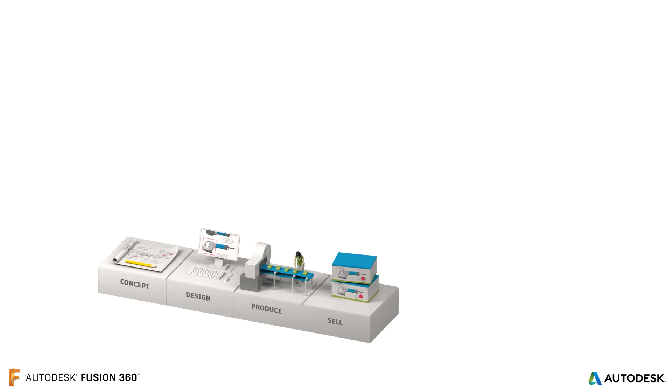If we start by looking at our customer's current process, we'll see that it is quite linear in nature. They start off on a concept phase, maybe creating some hand sketches for the design they want to generate, move into the process of generating more detailed design work, generating 2D drawings and bits and pieces like that to manufacture their products. Move into a production phase, into a traditional sales phase where they need to sell and see what the markets are doing, and then finally into an operate and retire phase.

Now we term this a traditional product lifecycle, and it only has a fixed product value. During the sales and operation and retire phase, companies are usually thinking about the next design that needs to come to market. Now, here at Autodesk, we're looking at the future of making things.

Our understanding of the future of making things is: during the concept phase, we personalize that engagement with the customer, giving them a bit more of a customized product. During the design phase, we collaborate with virtual teams across different time zones potentially. During the production phase, we take advantage of all the advancements in manufacturing, such as additive manufacturing with 3D printing and metal additive, as well as the advancements in CNC technology.

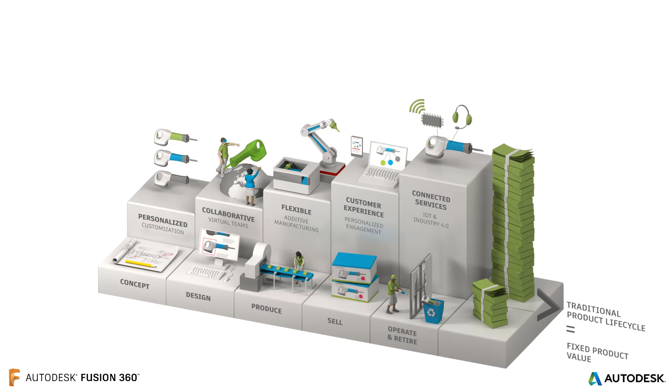During the sales phase, we have a more engaged customer experience, giving the customer a bit more of a personalized engagement. And then finally, we can go ahead and connect all of our products to IoT and Industry 4.0 to gather more information from the product while it's in use. We term this product as a service, and it has an increased lifetime value.

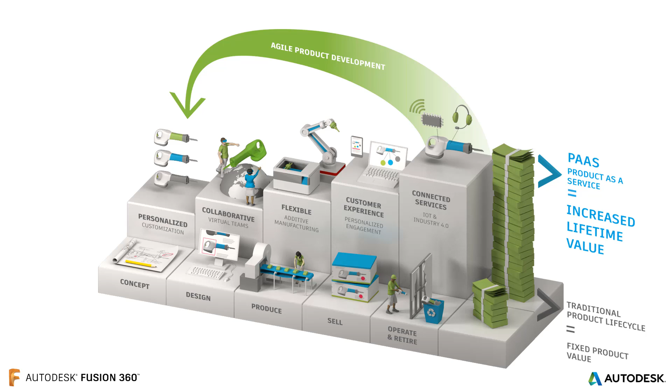This gives us the ability to have a more agile product development, taking information from when the product's out in use and informing that for the next generation of product that we need to generate. We term that the future of making things here at Autodesk.

We go ahead and sit that on what we call the product innovation platform. At the center of this platform is Fusion itself. We have our design phases, so we can quickly and easily start to generate the design that we need, from concept all the way through to production.

We go into our make phases and we can harness all the technology for CNC machining as well as 3D printing, and finally into the use phase, to then go ahead and connect our product and generate a nice complete solution from design, make and use.

Now, pushing the boundaries of this, we have other technology that sits within Fusion as well, something called generative design. From here, we can start to develop the design, optimizing cost and material usage, still maintaining strength, and still keeping that weight low, giving us a better product as we go.

During the make phases, we go into industrial additive. We have the ability to integrate CNC as well as additive manufacture, giving us the ability to potentially 3D print something and also do some final machining on it.

And then during the use phase, we have a product that we can connect into the ecosystem to then have Industry 4.0 feed us back that information into the design, letting us make more informed decisions earlier within the actual design process. This is what we term the product innovation platform.

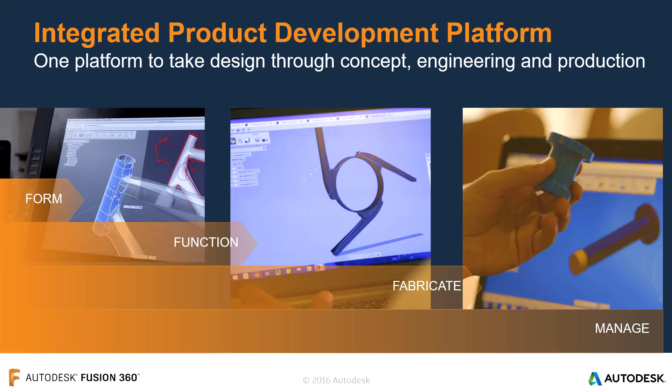It's a single integrated product development platform to take our designs from concept through to engineering and out to production. We can then look at the form, generating the model within Fusion, look at the function to test that everything fits together as it should, out to fabricate, whether these are traditional CNC machining methods or even the additive environment, and then manage all of that data within our product development platform.

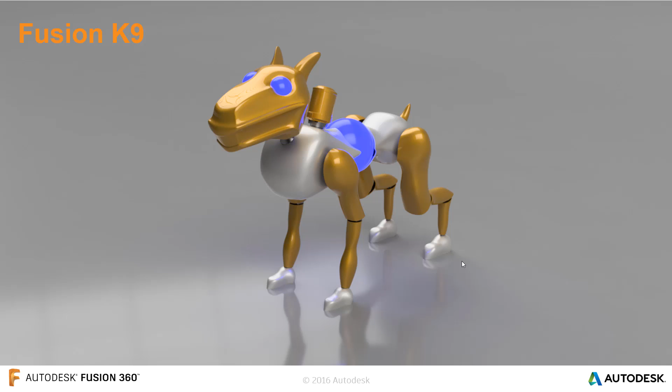So today we're going to go ahead and look at something called Fusion K9, which is a robotic dog. We're going to design a part of Fusion K9 itself, and we're going to take you through the product innovation platform. We'll look at the design phase, move into some communication, some virtual testing, a bit of visualization, and then finally the create phase itself.

So let's take a look at the design aspect of Fusion. We're going to design that chest that you see on the right hand side of the screen, and look at some parametric modeling as well as complex surface and ergonomic shape creation within Fusion 360. We're going to see the integration of the platform itself so that we can take a design really quickly from just a standard product all the way through to something a little bit ergonomic.

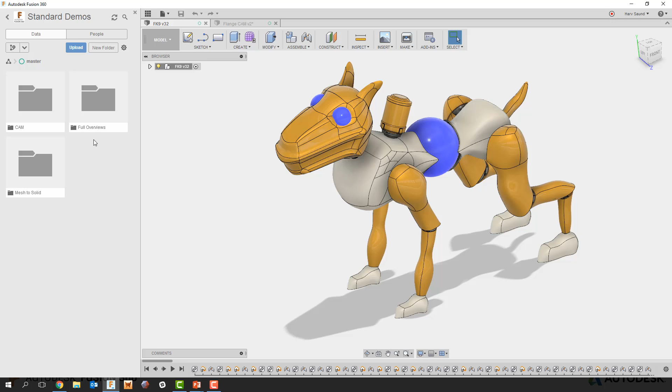So let's jump into Fusion. Fusion itself is quite a clean platform. As you can see, I've got Fusion K9 on screen just here. We have a nice toolbar along the top that's very neat, and a tree down the left-hand side of the screen that gives us all of our parts. We have the ability to see all of the projects and data we are working on, on the left-hand side of the screen, so we can access any part of that environment and organize that data as we need to.

So let's hide just the chest cover of Fusion K9 just here so that we can see what we're actually going to design. We need that chest section to fit into the actual part, into Fusion K9, and we can see the parts that need to merge into that body, so we can quickly and easily start to develop that design within Fusion.

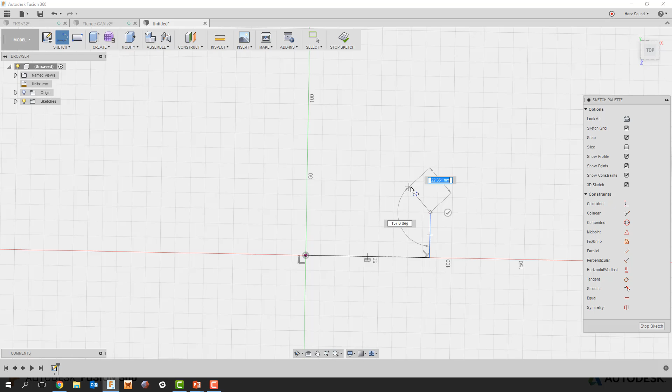So let's jump into a new design and start sketching. The first thing we want to do here is use your standard lines, arcs, circle tools to generate a real quick, real basic profile of what we're trying to create. Now this is just going to be a cylinder, so we're going to draw a few lines out, and then revolve this afterwards.

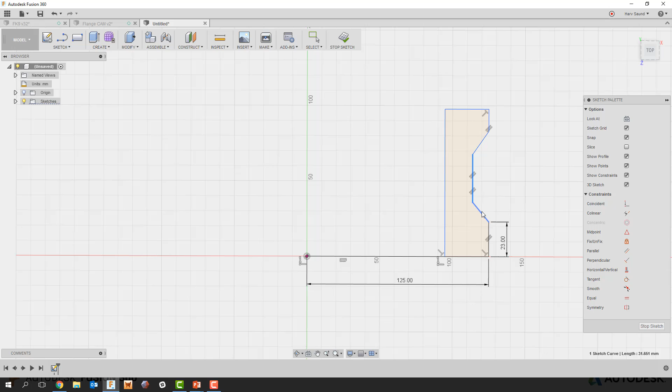Just like any parametric design, we may want to put some dimensions to the product so we can quickly start to set some real reference dimensions for our design. We may want 23 on this side, we may want to put some angle dimensions in, and really quickly within Fusion we can start to generate all the information required when we go to production right at a concept phase just here.

So we've got a few more dimensions to put in just here. We may want a height dimension or even a width dimension between these two lines, maybe a height dimension for the overall of 75 mil, and then maybe an overall from the origin as well. So really quickly, as you can see, we've got all of those dimensions in place ready to go.

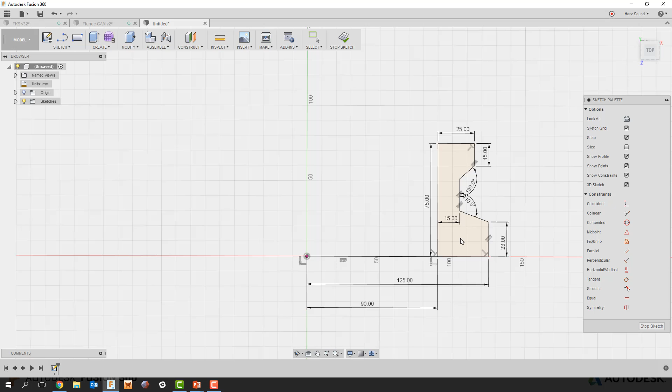Now we'll take that sketch that we've just created and jump into a revolve really quickly. From just a 2D product, we can turn the product directly into 3D. It's great, but it's looking a little bit blocky, so let's put some more curves to the design itself. Fusion's got a real powerful modeling engine, so really quickly and easily we can start to generate some nice shapes and curves for the design by just using our fillet tool.

We need to put a shaft through the center of the design, so we need to create a little hole for our design itself. We'll make it a 30 mil circle on the center of our design. We may want another one of those circles just below, so that we can fit a secondary shaft in place, just an idler, and then we'll put a dimension between the two of, let's say, 10 mil. We'll also line this second circle up by using some constraints to the first one.

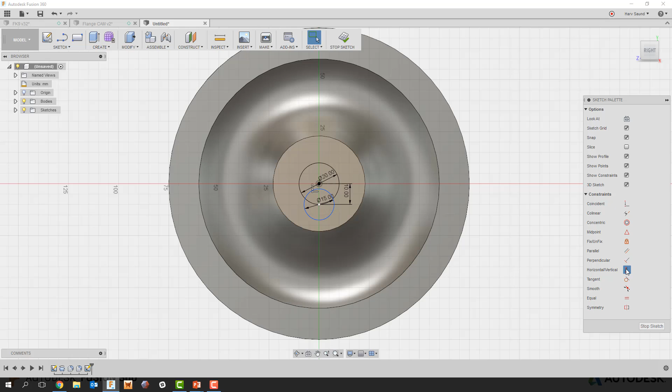And then from there we can pick the areas that we want to create a hole from, and we'll just drag that back, and again very visually we can see exactly what we're doing within Fusion itself.

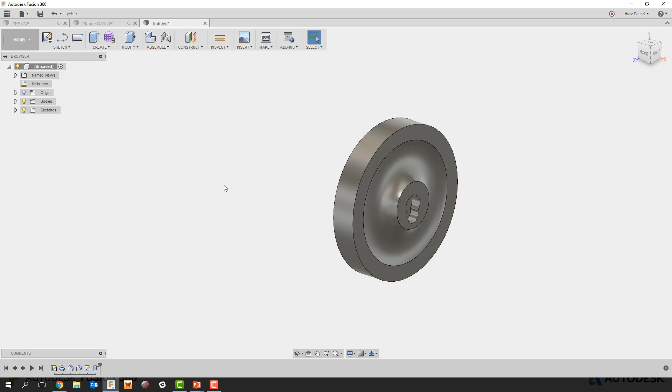So great, we've created a parametric design within Fusion. We could go ahead and go into our drawing environment just here, but we need that ergonomic shape in the middle first. So we're going to jump into Sculpt, and we're going to go ahead and use a primitive shape.

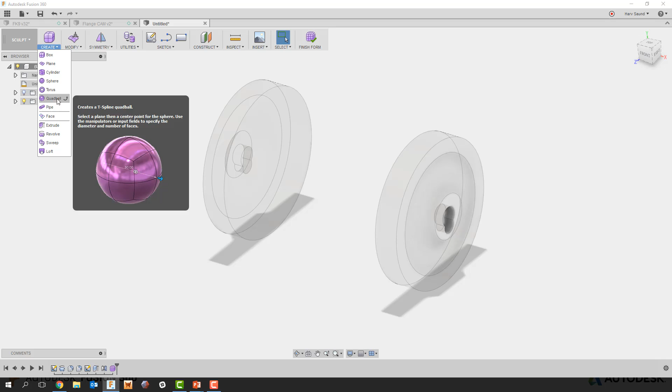Now Sculpt is like using plasticine. We can quickly and easily start off with a primitive shape, put any symmetry and bits and pieces in it that we need to, and we use push and pull technology. Now this technology is called T-splines. So from here we can quickly start to generate some real ergonomic, real nice detailed shapes for our design.

We may want to go ahead and create some hard edges just here so that we can line all of this up to the parametric shape that we've already generated. So we're going to use a tool called crease just to crease those edges. And what we'll also go ahead and do here is just select those faces and flatten them off, kind of creating almost like a drum for our design.

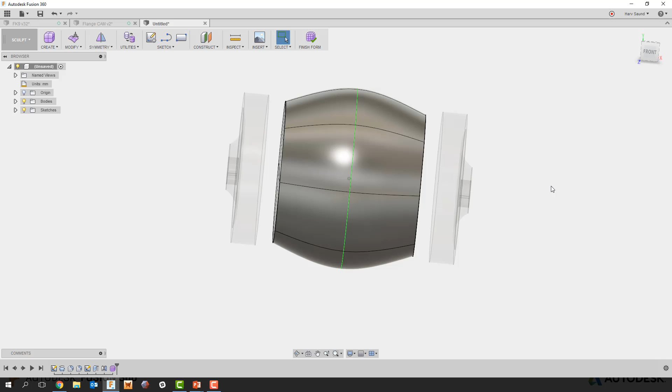Specifying a couple of edges, we can quickly jump into our edit form tool and allow us to quickly push and pull that design as we need to. We can scale edges, we can drag, and we can move as we need to. So it is just like when we used to play with Play-Doh or plasticine as kids.

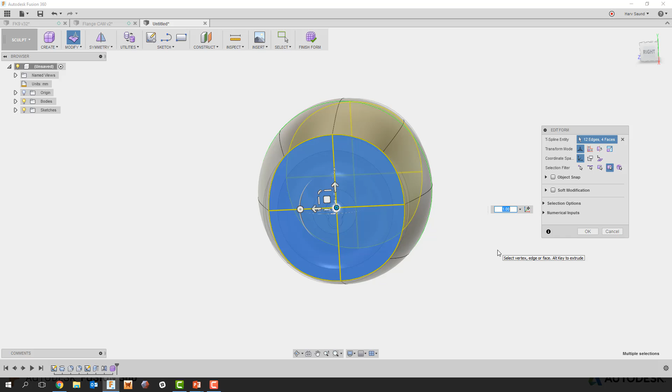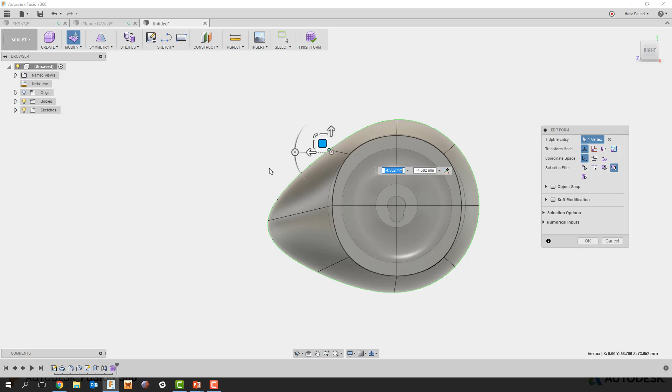So great, we've been able to go ahead and line everything up at the moment. But what we want to go ahead and do is just drag this front section out. It's as easy as a couple of clicks. Really quickly and easily pick the point, choose how you want to drag it, and you can quickly go ahead and drag that design. So generating that initial wow model and the initial ergonomic shape is quite quick and easy to do within Fusion itself.

Already with a few clicks, we've generated Princess Leia's head just here. So really quickly and easy, we've been able to go ahead and look at generating the part using parametrics, the two side pieces, and also using T-spline technology to generate that middle ergonomic shape. We'll give it a save, and it also creates versions for us.

So let's just jump back into the PowerPoint. We've looked at that 3D design development, generating the actual parametric shapes that we need initially. We've gone into the complex surface design tool slightly so that we can start to look at some of those ergonomic shapes, and it's all within that one integrated environment.

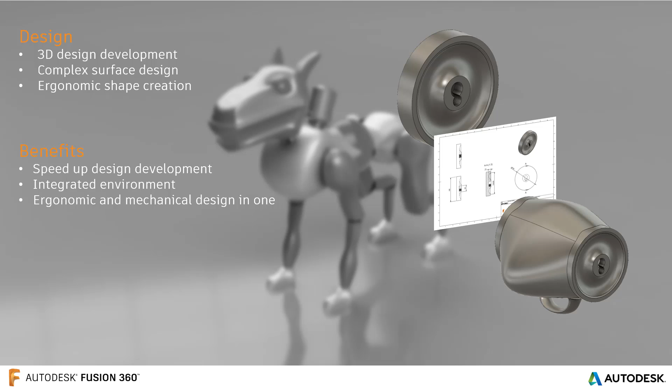So let's go ahead and take a look at some of the benefits. We can speed up that design development. Like I mentioned, it's in an integrated environment, so we can quickly and easily go ahead and iterate the design between the two, and we have that ergonomic and mechanical design in one. No need to go ahead and turn add-ins on or off. We've all got that all in that one environment.

That's our design phase done. Let's move over into our communication. Now, communication is key when generating designs for our customers. So we're going to go ahead and look at some of the really powerful communication tools within Fusion 360.

Now, we can collaborate with different teams on different time zones quite easily within Fusion. We have something called live review sessions, which we'll go through in a bit, and we'll also go ahead and look at some of the approvals and recommendations quite instantly that you can get. So let's jump back into Fusion.

Let's go ahead and look at this communication tool. So down at the bottom of the Fusion window on the left hand side of the screen, you'll see a little comments tab. From here, we can start to generate comments for our design, giving any kind of comment that we need at any type of position that we need at this stage. So let's put in chest V1 done. What do you think? And we'll post this.

Now, one of the key things for us within Fusion is we've got the ability to either open the design on a web or even on a tablet or a mobile phone.

So we can quickly and easily go ahead and access that design anywhere we are in the world, just in a web browser. As we can see from here, we've got that design open in a web browser.

We can see the version, and we can also go ahead and share that design with anyone we need to. This can be public, or we can put a password on it to make sure that it's a little bit more secure. If we view that design, we have a lightweight browser viewer, so we don't have to install anything on our machine to do this.

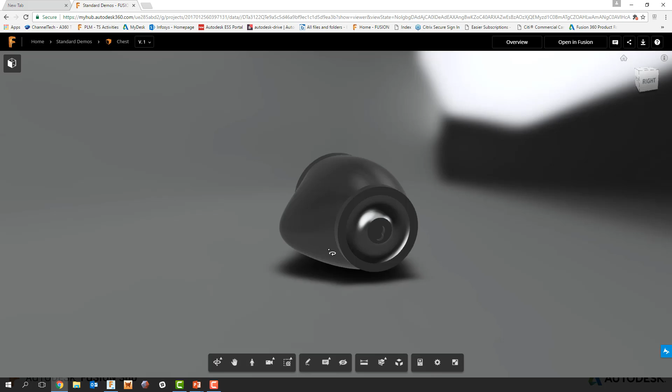We can quickly and easily go ahead and start to interrogate that design, looking at section analysis, maybe also going ahead and doing a bit of measuring if we need to. But we can also go ahead and see the comments that have been made for our design.

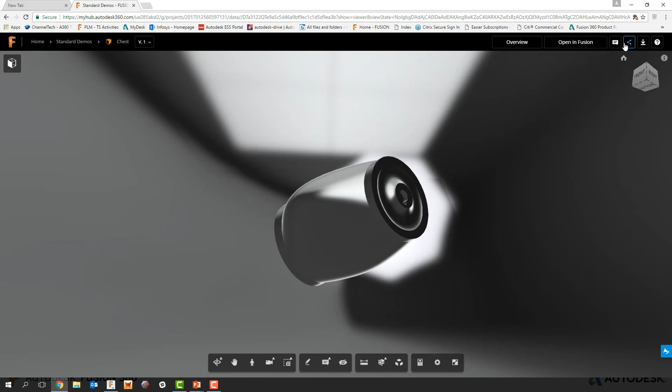Now, I made that comment directly within Fusion. We can see that directly there, but this customer may want something a little bit more, so maybe we want to go ahead and put a handle in this bottom area. We can pick on a point as to where that handle needs to be, and we can attach a comment to that.

So it gives us the ability to quickly and easily start to communicate that design with a multitude of different teams. Popping back into Fusion and giving it a quick refresh on the comments tab, we can see that comment appear. So really quickly and easily, we get the ability to have that co-collaboration with whoever we need to within the actual design environment. So we need a handle here.

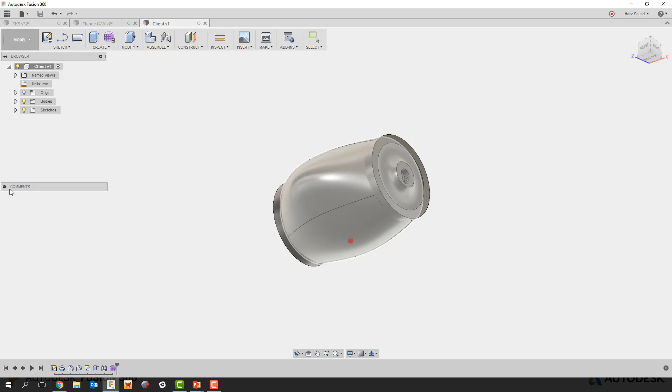Okay, let's go ahead and start developing that design within Fusion a little bit further. So we're just going to jump back into the T-spline itself, or the ergonomic shape that we've created, and we need to go ahead and create almost like a boundary so that we can go ahead and drop that handle in, without affecting anything else on the design itself.

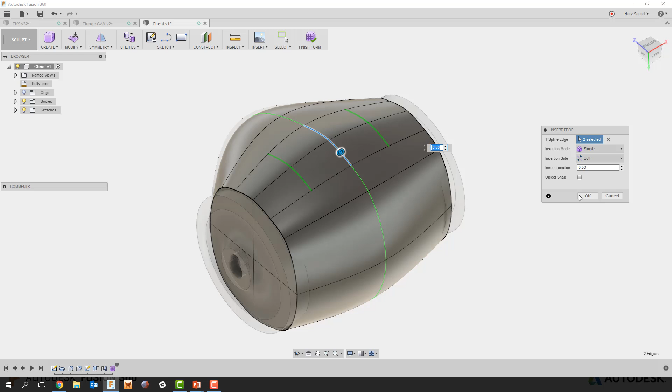So we'll insert a couple of edges just here, just so that we can create a small little boundary that we can go ahead and use. And with that, we also want to go ahead and just tweak this shape a little bit.

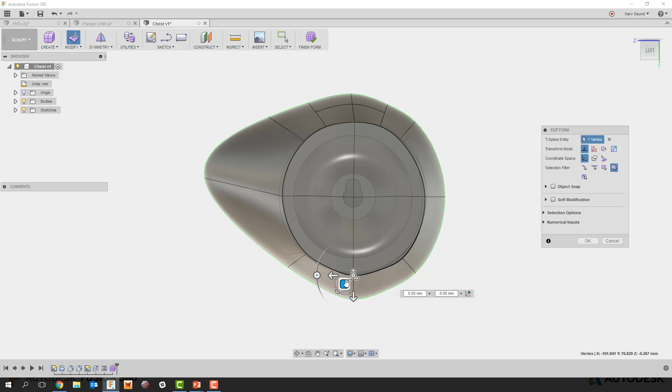Now, popping back into our edit form tool, we can quickly grab points or vertices within the actual T-spline itself and just drag them around, giving us some real free form fluid tools that we can quickly start to develop our designs with. Again, this gives us the ability to generate the kind of data that we need for the customer. Now that's done, we can see that symmetry has allowed us to do that on both sides.

Now what we want to go ahead and do is create that handle in this top section. We'll get rid of the symmetry initially so that we can then go ahead and bridge between, and we'll pick up on these four areas just here, or these four divisions that we want to go ahead and use. Just dragging this handle up, we can quickly generate that handle in a primitive.

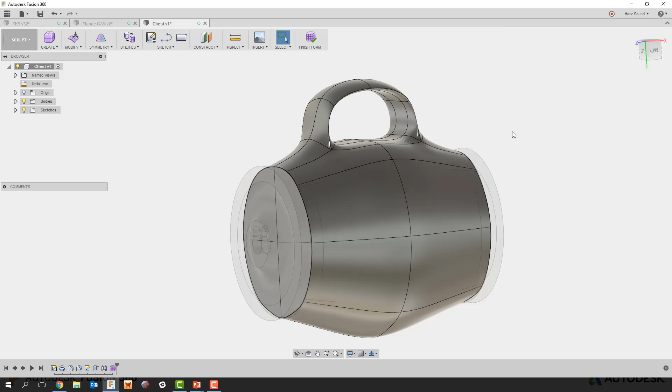From here, we need a handle, so it needs to have a hole. So what we can go ahead and do is use some of the powerful T-spline tools within Fusion to go ahead and generate that. Bridge allows us to quickly and easily pop a hole through there, and we can then start to create the kind of handle shape that we're looking to use.

Again, real fluid, really easy to do within Fusion. This is a lot more difficult to do with potentially other software on the market.

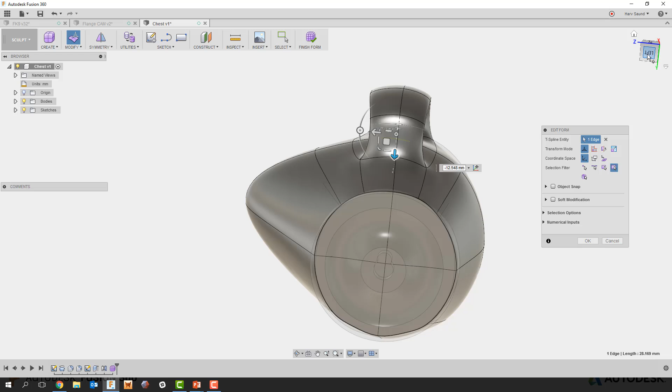Now, really quickly and easily, we'll just finish off this handle design. We'll just push and pull, create a nice handle that we need. We may want to go ahead and start moving this around a little bit, make it slightly shorter, give it the right angle that we need on the design, and really quickly and easily, that real complex geometry is done directly within Fusion.

So now that the handle's added, and we've done that within a matter of minutes, popping back to the comment section, let's collaborate and let's communicate this design change to the customer. So we can say: handle's done, what do you think?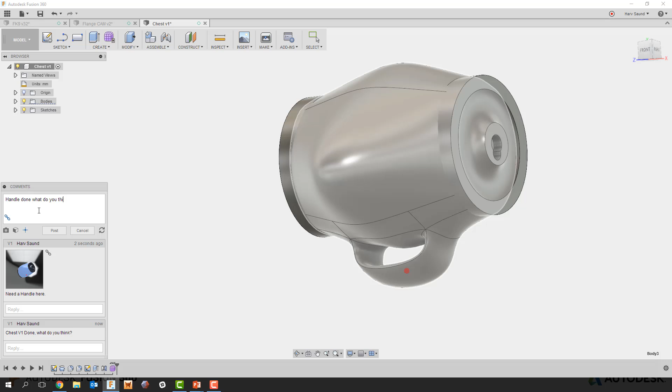We can post this back to that customer and it will upload that design, and it will also upload that image that we've just generated there. So now that it's uploaded, let's pop back into the web browser.

We'll give this a quick refresh, and pop back to our standard demos itself. There we go. We can see the chest, and it's now got another version attached to it. And if we view the design directly within the lightweight web browser, we can already see that that design has been updated.

So instantly we can start to get some feedback and collaboration from our users or from the customer that we're going to go ahead and work with. So the customer can go ahead and say, looks awesome. Can we potentially look at a 200 Newton load on the top face of this design? So it gives us the ability to collaborate all the way through. So let's just finish off that note and see if this product will withstand the test of time.

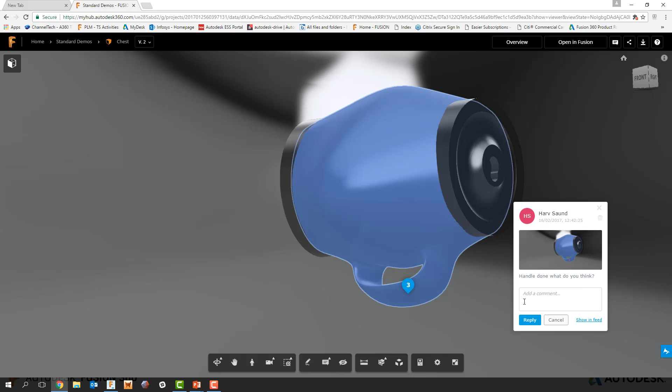So we'll reply to that comment that we've already created, and then we'll pop back into Fusion. And what we can see from Fusion is we see that reply directly under our comments tab. So instant collaboration for us just here within Fusion 360, giving us some really powerful collaboration tools that we can go ahead and use.

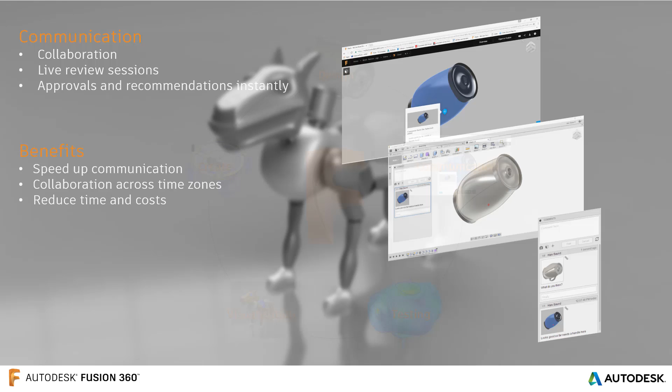So let's pop back into the PowerPoint. What we can go ahead and do, like I said, we've collaborated with users. We can open up the design within a web browser or even a mobile phone. We can quickly and easily start to create comments within Fusion, and we can develop our design quite quickly, giving us the ability to have that back and forth with anyone, speeding up that communication and getting that approval almost first time, giving us that collaboration across time zones and across sites, and reducing that time and cost having to wait for someone to go ahead and try and approve the design.

So that's the communication side of things done. Now the customer wanted to see what would happen if we had a 200 Newton load on the design. So let's pop into our testing phase. We're going to go ahead and look at virtual testing this design with a 200 Newton load at the top face of the product. We've got some high-end testing tools within Fusion 360 that we're going to go ahead and take a look at, and we can check to see if this is built to last.

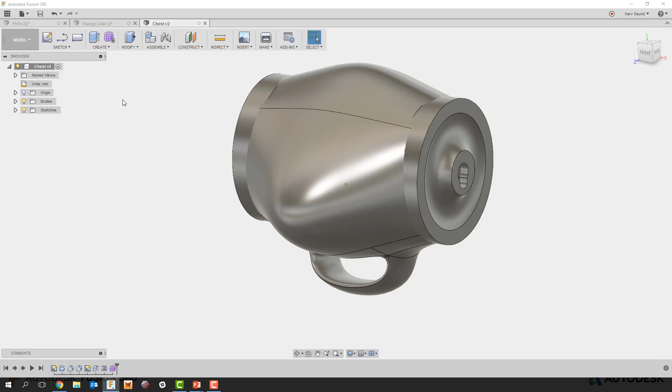Now we have a multitude of really high-end simulation tools that we can use for Fusion 360. Starting off with static stresses, we can do structural buckling, modal frequencies, thermal stresses, event simulations, nonlinear, and shape optimization. Shape optimization being the start of the generative design phase.

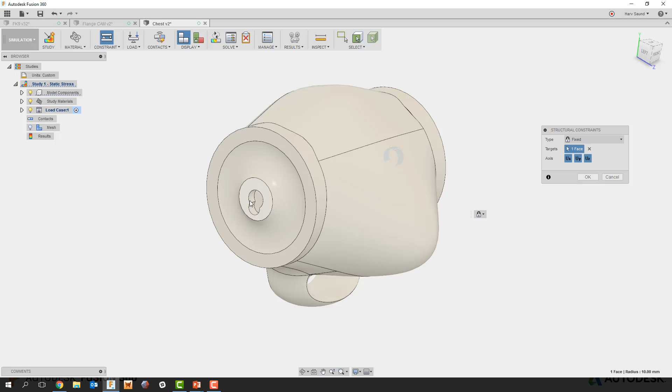So from here, once we've specified a static study, we can then go ahead and start specifying the study materials, and we have a material library that you can pick from or you can add to. Specify the constraints - this is where the actual part's going to be held in a real life scenario, so it's going to be on these two areas just there where the shaft would go through the middle. And then finally go ahead and apply the load to our design.

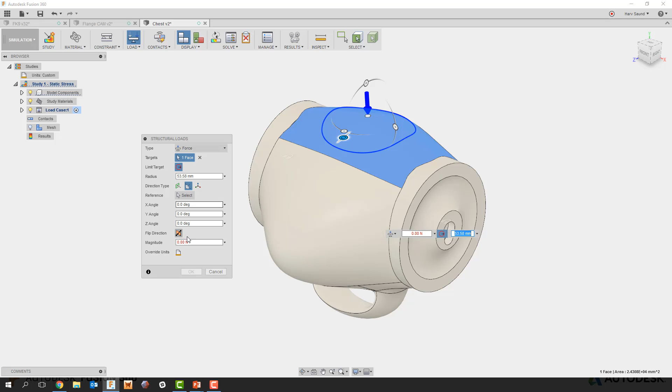So from here we can start to go ahead and specify the overall load targets, so where that load's going to be applied to our design. We can go ahead and reduce the size of that target if we needed to, and we can also go ahead and give that load a magnitude. So for this design, we're going to go ahead and say that's 200 newtons.

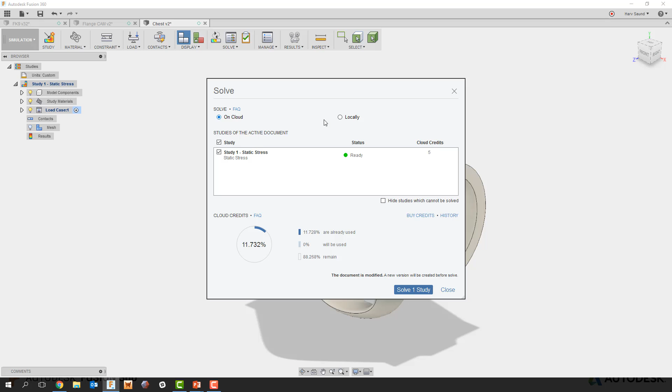So really quickly and easily, the setup goes from left to right. We can check to see degrees of freedom, and then finally we can make sure that the design is all verified and we've got everything in it, and we can go to solve. Now we have two options for solving - we can do cloud and local.

Cloud gives us the ability, if we don't have the hardware at hand, to go ahead and push all the processing up to cloud. We also have local, so if you did have the hardware, you can quickly and easily run that simulation like I'm doing here locally on your machine. A real flexible approach to not just simulation, but we'll also see that a little bit later with the rendering as well.

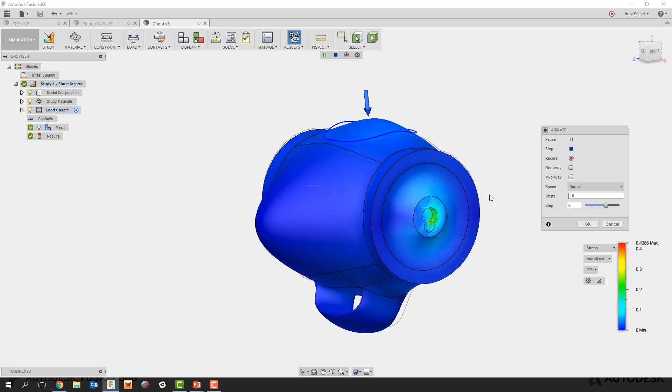Once the simulation is done, we can start viewing the results. In a real quick and easy fashion within Fusion 360, we can look at displacements, stresses, factor of safeties and strains, giving us a good indication of what that product's going to do when it has that 200 Newton load applied to the top of the design. We can animate and record, giving us the ability to communicate that design and get approval first time.

And finally, we can also start to generate reporting functions from this as well. So let's pop back to our comments phase. The customer wanted a 200 Newton load on the top face. We've done the simulation, let's allow them to look at the results. So we can say that the stress test is done. We can check the results.

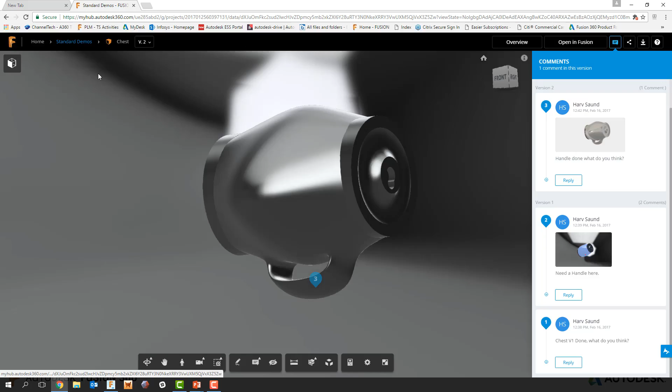And we can see what the customer thinks. So again, if we post that - posted it just there. Let's pop back into our web browser, and from our web browser let's give this another quick refresh. So from here we can see that it's already saved a version, another version itself.

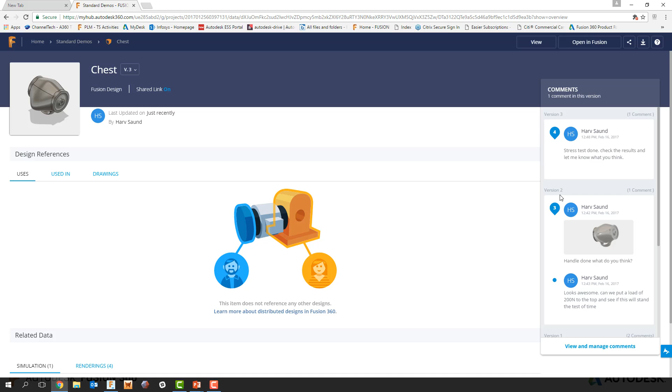And if we did want to change that design from, let's say, a first concept, we can always promote a previous version. And we can see that comment on the right hand side of the screen. So the stress test is done, and we can also see that all those comments have been version captured, so you can capture an audit trail for your design.

Let's pop into the View tab, and from here we can start to see the simulation results directly live within our web browser. Again, nothing needs to be installed, so from here we can quickly and easily interrogate the stress results that have been created. No need to send emails or anything like that anymore. We can quickly and easily do that directly within a web browser, giving us instant feedback for stresses and displacements, making sure that the design is correct.

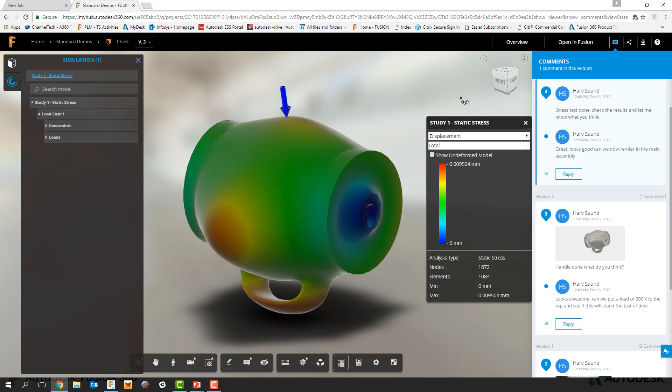So from here, the customer's happy. He can say, great, looks good, can we now render the product? We're going to jump back into the rendering side of things in a moment, but that is our testing side of things done. A real quick and easy way to generate that test and create the kind of data that we need. And as we can see in Fusion, we can see what the customer requires - we've got some really high-end virtual testing tools within Fusion 360.

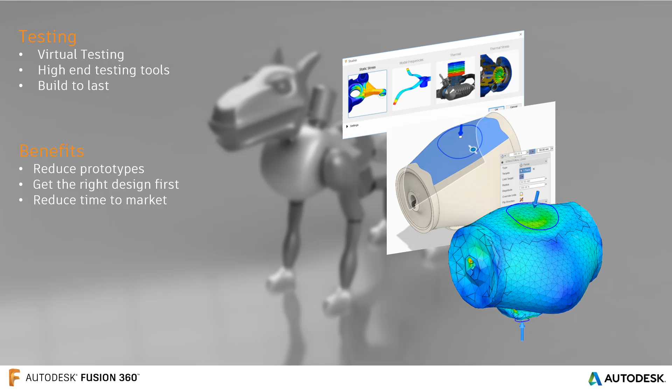The ability to take a design from art to part. We can reduce those prototypes, get that right design first time round instead of iterating on prototypes, and potentially reduce that time to market for the product. So that's our testing tools.

Customer wants to go ahead and see a visual of the actual product itself, so let's pop into our visualization tools within Fusion 360. Now again, we have some really high-end rendering tools within Fusion 360. Using ray tracing technology, we can create some really nice images. These can be cloud or local render, and it's a real easy and quick setup. Just like the simulation, we'll start from left to right, giving us the ability to create some real nice renders directly within Fusion 360.

Popping back into Fusion, the customer wants to see that render. So the first thing we want to do initially just here is drop that chest into FK9. So from here we can go ahead and insert our chest design that we've just created, and we can quickly and easily rotate and move that into position as we need.

Now for this design I could just leave it where it is, but what we're going to go ahead and do is just drag this out a little bit, and from here I'm going to show you some of the tools that we can use to then start to joint things together. Now our tools to put things together in an assembly are called joints, and they're really useful and really powerful.

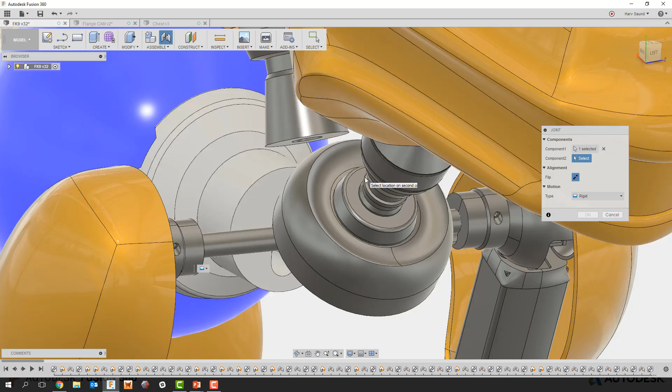So what we can do here is activate the joint tool. We can select that we want the center of that shaft or the center of that hole to sit on the center of our shoulder just here, and Fusion will go ahead and joint those two together.

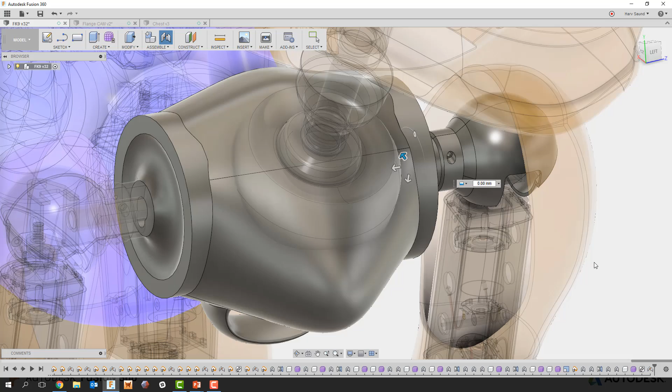Now one of the key things that Fusion does here is it allows us to animate the kind of movement that we would get for the product itself. So we can release the area that we want to go ahead and use. If this was sliding along that shaft, we can go ahead and just release the sliding element of that product, and really quickly and easily, the chest's in place.

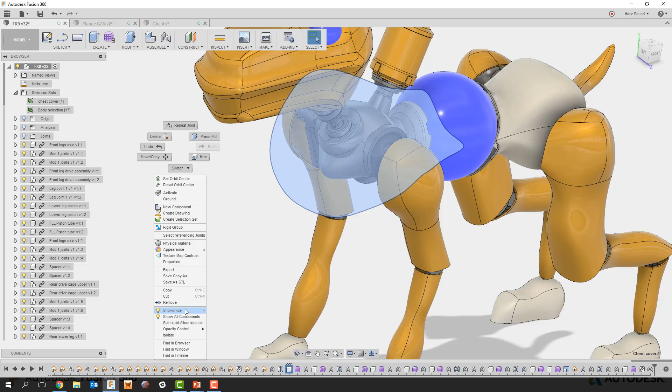It looks like it fits quite well. We may want to go ahead and just combine everything together just here so that it is one complete body as well. Now with that, let's go ahead and bring back the chest cover that we saw that I hid earlier right at the start of the demo. So quite quickly we can just hide and show that.

And let's now jump into our rendering workspace. So that's done. Let's pop into render and let's go ahead and start looking at how we render this product as well.

So our rendering workspace, again, the UI is completely the same as it was before, just some different tools along the top, and we can quickly start to set the kind of camera angles and the position of the design. We have a load of different appearances that you can add to your designs, and we can also download extra ones directly into the library itself, as you can see.

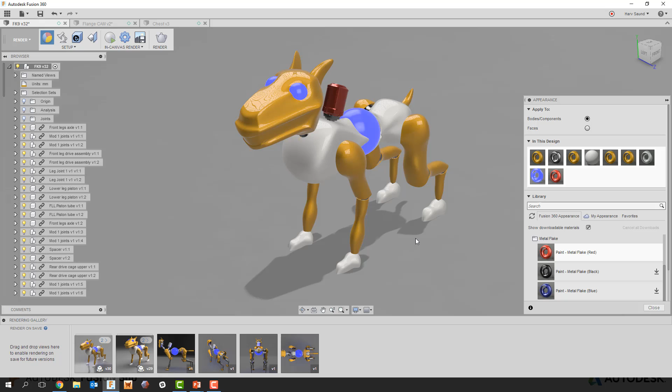Now, if I want to use this metal flake appearance, all we need to go ahead and do at this stage is drag and drop. There's no need for us to go ahead and go through any complex processes. It's just a simple drag and drop to add that to our design, and we can add that metal flake.

Once we're done with all of our appearances, we can start to specify the environment. So we can specify the type of ground that we're going to be using, the type of environment we want to go ahead and put our FK9 into. From here, we can quickly and easily go ahead and have all of that information set.

I'm going to just activate an in-canvas render just here. So this is going to turn my screen into the rendering environment. So from here, we can start to see all of the LEDs and bits and pieces appearing.

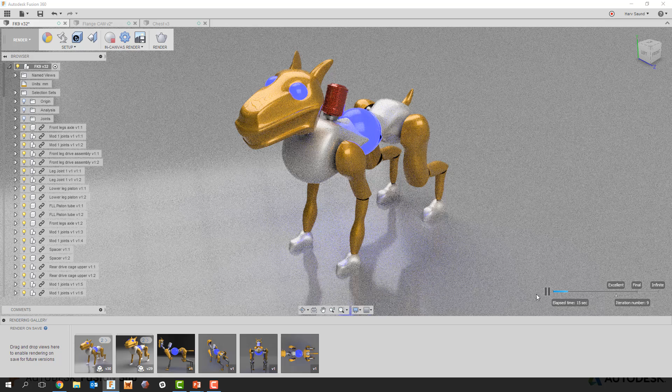Now we're using ray tracing technology, so we can quickly and easily start to set a threshold. Ray tracing is just going to refine the image until it reaches a threshold, and it goes ahead and gives us that really nice final image that we can use.

And again, just like with simulation, we have the ability for cloud and local render. So we're taking away that hardware requirement for you to have. If you need to do rendering, you don't need a heavy machine to do that. You can pop it onto the cloud for Fusion 360.

And you can also, at this stage, create turntable renders. So if you just wanted to show a really nice render of our FK9 turning around, we can quickly and easily do that within Fusion 360's rendering engine.

So let's pop back to the PowerPoint quickly. So again, we have those high-end rendering tools. We can quickly apply those appearances and the environments, set our depth of field, all of our reflections and bits and pieces.

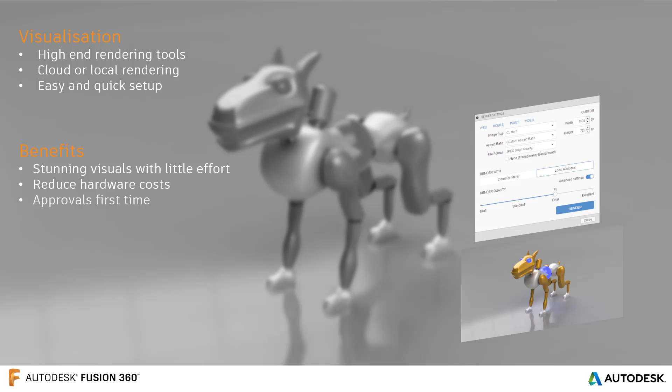And we can send the design to either cloud or local rendering, again giving us the ability to take away that hardware requirement from you. So we can create those stunning visuals with very little effort within Fusion, reducing those hardware costs that are very dear on traditional packages, and we can quickly get those approvals first time from the customer.

Now, great, we've been able to go ahead and take the design through from a design, communication, test, and visual, but we need to make it.

We're going to look at three different elements: additive and subtractive manufacture, where in Fusion we can do anything from 2.5 to 5 axis machining and look at all those detail manufacturing options, and also a third modeling environment called direct editing.

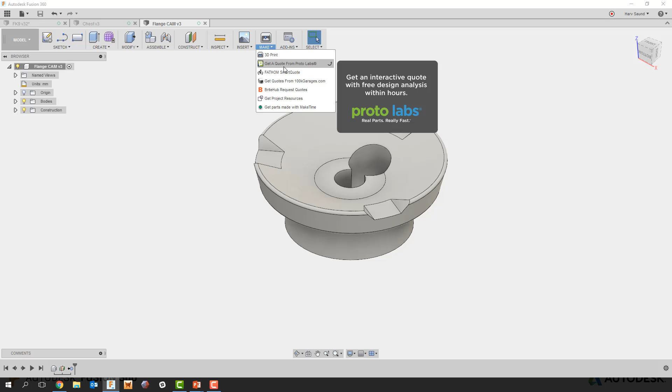First things first, let's look at some 3D printing. So we've got our design—this is just the hip section of our Fusion Canine—and what we want to do is send this for 3D print.

We can send it to a printing bureau, or directly within Fusion we can select the design, make sure the mesh is okay, and push this out to an STL or OBJ. From here we can also launch Print Studio, or a third-party program, to do all of the slicing for us.

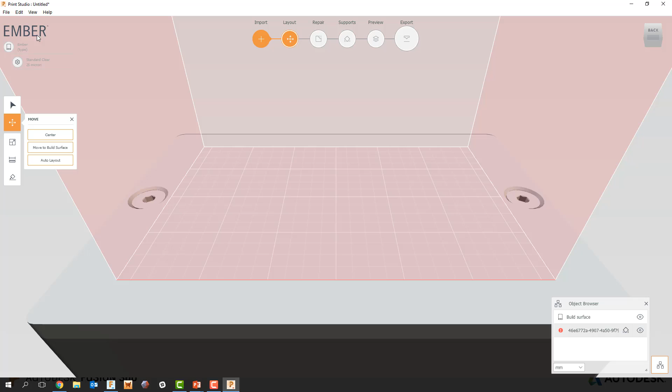Print Studio will allow us to quickly and easily set a printer that we want to use. Let's say we want to go for a MakerBot Replicator.

From here we can scale that design to fit, so we can quickly have the type of design we need directly within the bed of the printer, making sure it fits. We can also move it around, optimizing the rotation for specifying our supports.

Print Studio will allow us to quickly and easily start adding support structures into the design itself, giving us a quick environment we can use.

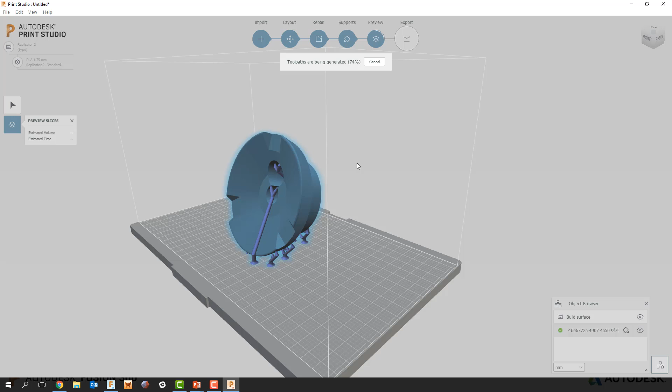Once we've hit the preview tab, this generates all of our tool paths for us, giving us a real nice toolpath we can create and showing us all the slices as we go through the process. It gives us an overall estimated time, and at this stage we can export directly to a printer file or directly to that MakerBot.

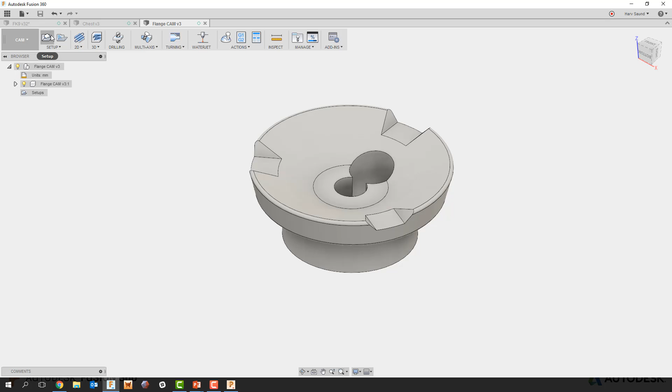Popping back into Fusion, we have integrated CAM tools. Initially we can choose whether we want milling, mill turn, or even water jet cutting. We can specify the stock offsets we need, and also specify where our origin is going to lie on the stock we're going to be using.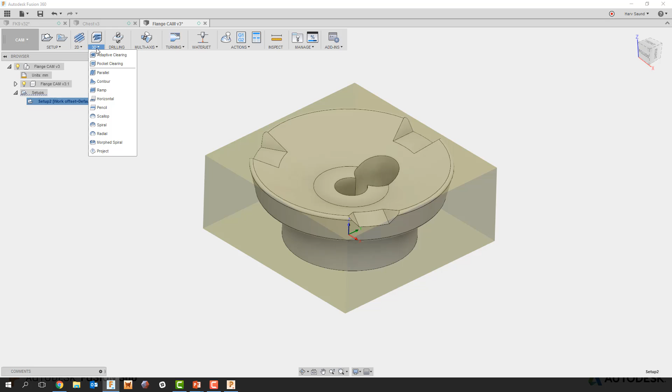Once our stock and setup is done for our design, we can start going into either 2D or 3D milling options. For 2D options we have to pick our individual contours; for 3D we can just go at it with automated strategies at this stage.

We can specify our tools that we want to use, and all of our tool libraries are customized to suit the tool cribs that you guys have. From here all of our feeds and speeds are set, and we can specify what boundary we want to go ahead and machine.

So if I want to go ahead and machine that boundary, we can, and we can specify the overall height. If our bottom height is going to be the base of that top section of this flange, we can set all of that quite quickly within the design, and very visually.

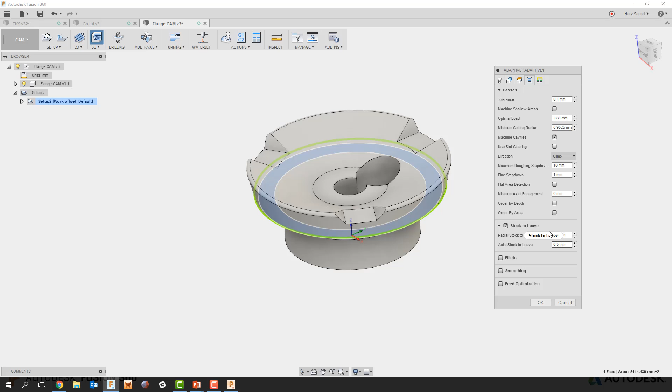From here we can start to specify bits and pieces such as stock to leave and also our ramping conditions for our mills.

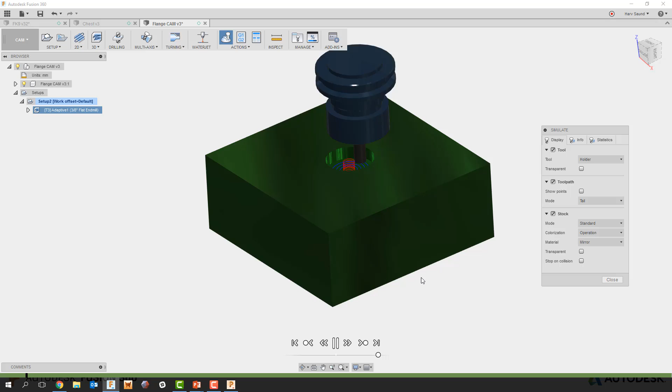This then starts generating all of the automated toolpaths for us. Using that adaptive clearing strategy, we can quickly develop the CAM toolpaths we need for our design. Let's simulate this design and we can see that toolpath completely created as a real quick roughing strategy we can use.

We can take this design further and manipulate it as we need to. Fantastic—we can see a real nice toolpath starting to be created already. Now let's go ahead and pop over.

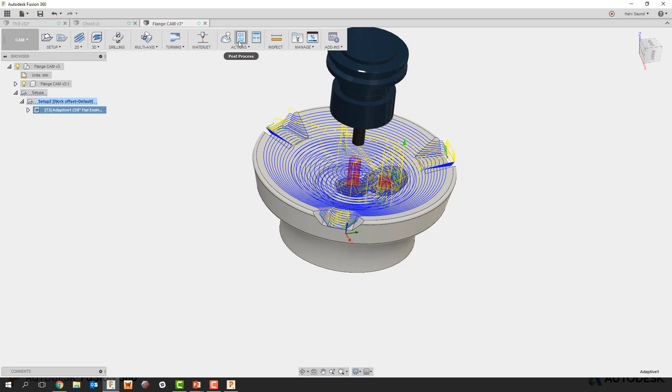We can post this out now, and we have the ability to have our own posts, so we can have certain posts set in our cloud libraries, but we also ship Fusion 360 with a whole host of generic posts that you can then go ahead and grab. If you need to modify any of these, you can do so directly within Fusion as well.

Now, once the design's done, great, but what about if we need to go ahead and change this? If we pop back to the modeling environment, we can use something called direct editing. This gives us the ability to quickly and easily use push-pull techniques to generate the kind of shapes or changes that we need for our design. So we can just grab faces and make some dimensional changes if we needed to. It's quite simple to do.

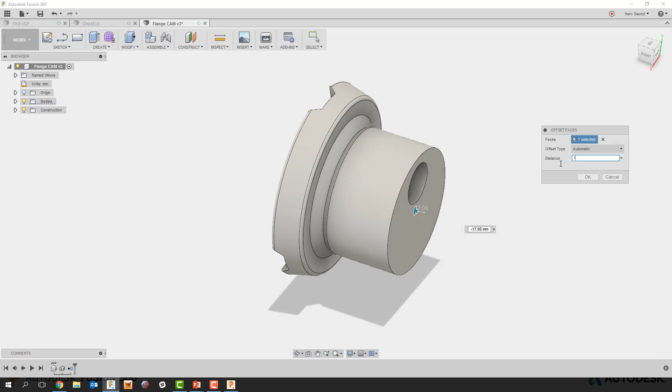But what about if we wanted to go ahead and change maybe the diameter of that hole just there? We can pick up on the hole and we can quickly and easily start to make some diameter changes to that hole as well, specifying whatever size we need, and you can start to see that visually as well by just grabbing that arrow.

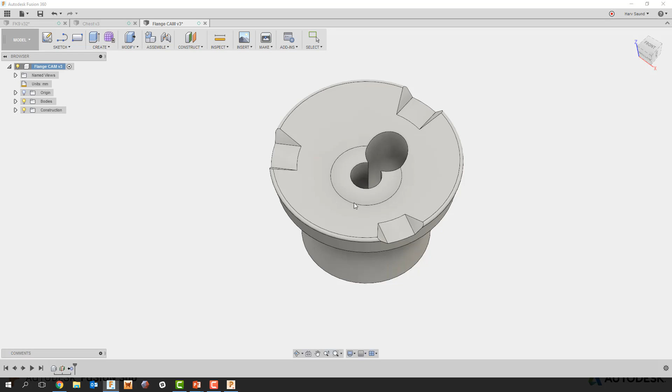Now, what about we've got this design in, but we may want to go ahead and change one of those slots out, maybe move it around a little so it's not quite symmetrical all the way through. We can jump into our direct modeling engine to do this. Fusion's unique in this environment because it allows you to do both parametric modeling as well as direct editing, and the power of each is incredible.

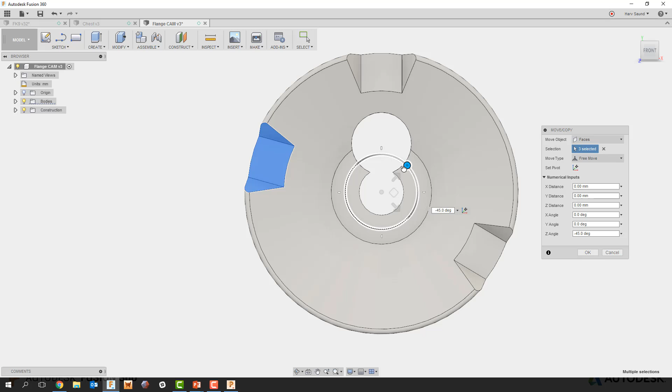We specify what we want to go ahead and move. We specify a pivot point that we're going to use, and really quickly and easily we can start to grab and just drag areas of the design to start making changes. It's a real powerful methodology to use, and you can see that everything updates accordingly.

Now, what about if we want to go ahead and move this hole slightly down and maybe have two holes instead of just that one cutout or one slot? We can just, again, dynamically grab and drag. There's no need for us to go ahead and delete geometry, redo geometry. Really quickly and easily, we can make sure that everything updates accordingly as well.

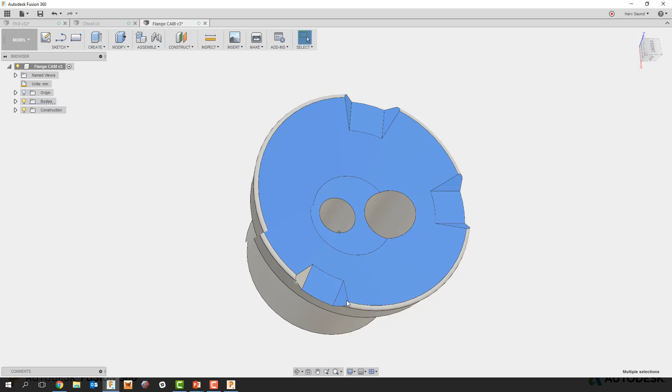Now that's all great, but what about if we want to make a bit more of a major change? This top section maybe needs to go ahead and be rotated by about 6 degrees. So what we want to do here is potentially pick up on all of these faces that you can see on the screen that I'm picking. And from here we want to maybe make some small changes to that design itself. Okay, let's just pick this bottom edge as well. Great. Now, we've picked all of that area just there.

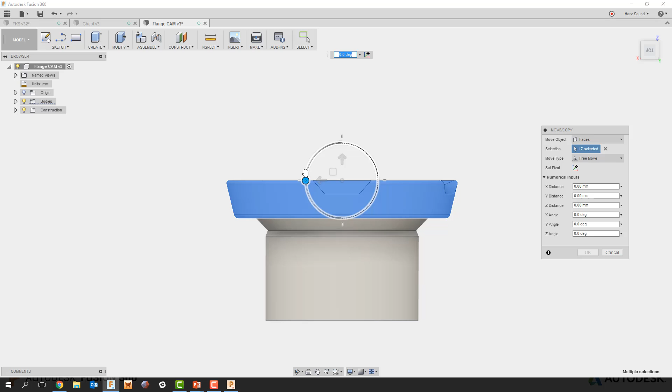The power of direct modeling allows us to quickly and easily go ahead and just grab and drag. The chamfer below, as you can see, makes those updates with those changes, giving us the ability to quickly and easily go ahead and make any changes that we necessarily need for our design directly within our design.

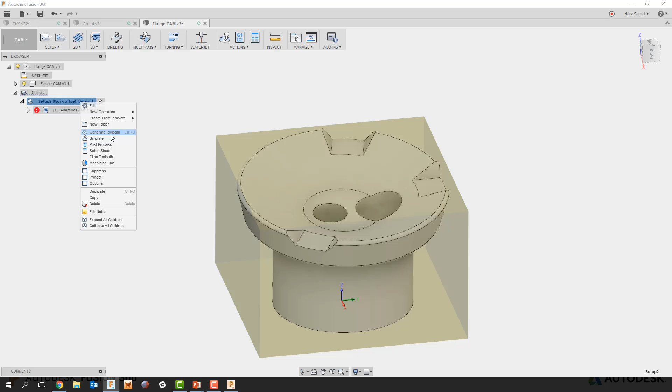Now, that's great. I've put a CAM toolpath to this. Right click, regenerate the toolpath. All the stock has updated with all the overall sizes that we need, and so has our toolpath. So Fusion 360 has an extremely powerful integrated environment to do this, giving us the ability to quickly flow through, make any changes that we need to, and have all of that information directly there. So what we actually have is low-cost, high-quality manufacturing directly within Fusion 360, reducing the effort and time and giving us a faster time to market.

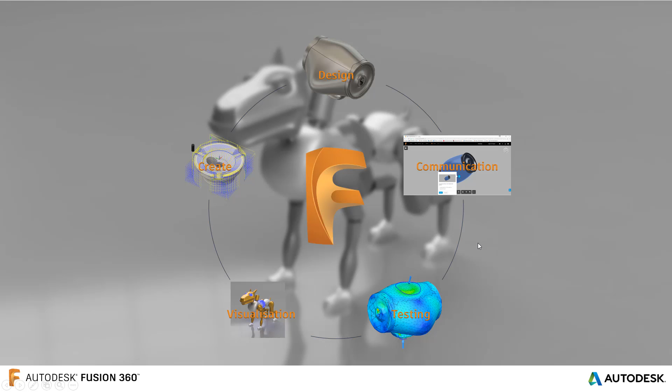And that's our create phase. So what we've looked at here is the design element, popping that design to communication, going from communication into testing, testing to visualize, visualize to creation, giving us a real quick environment that we can use and one single integrated platform. So we've touched on a few of these areas: parametric modeling, some part libraries and contents, some machining options, and that all sits at the center of our product innovation platform, giving us a complete design, make, and use integrated solution.